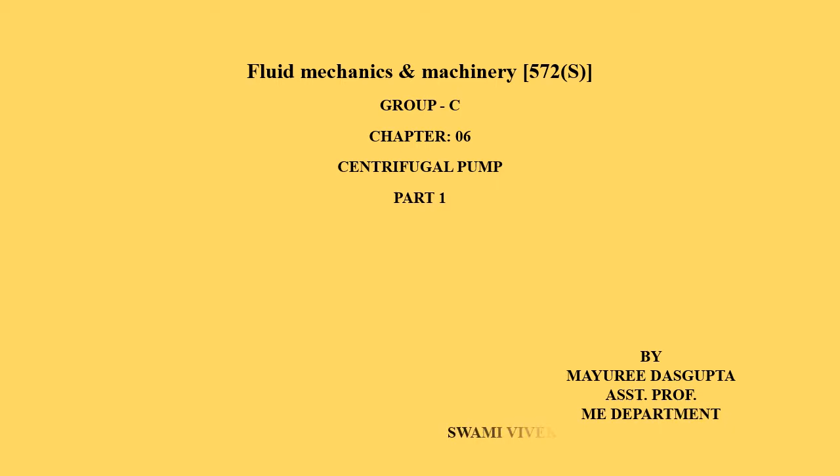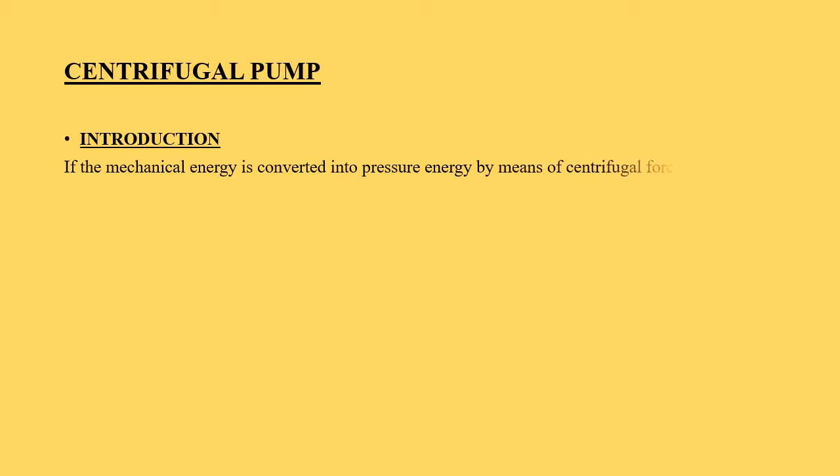The hydraulic machines which convert mechanical energy into hydraulic energy are called pumps. The hydraulic energy here is in the form of pressure energy. If the mechanical energy is converted into pressure energy by means of centrifugal force acting on the fluid, then the hydraulic machine is called a centrifugal pump.

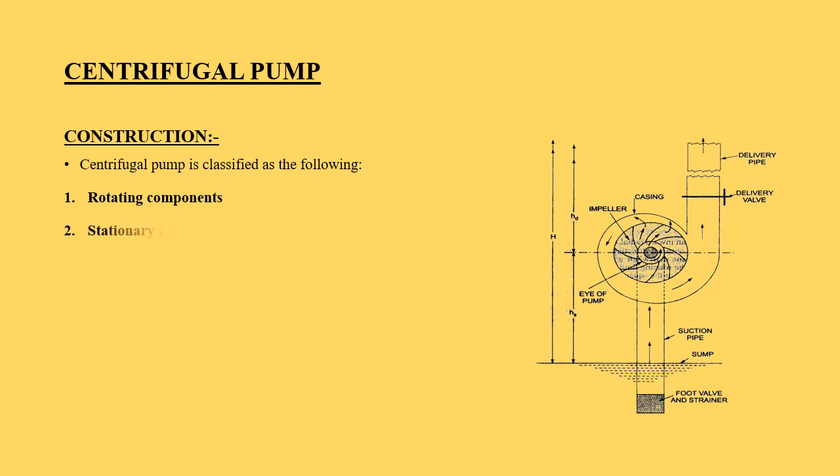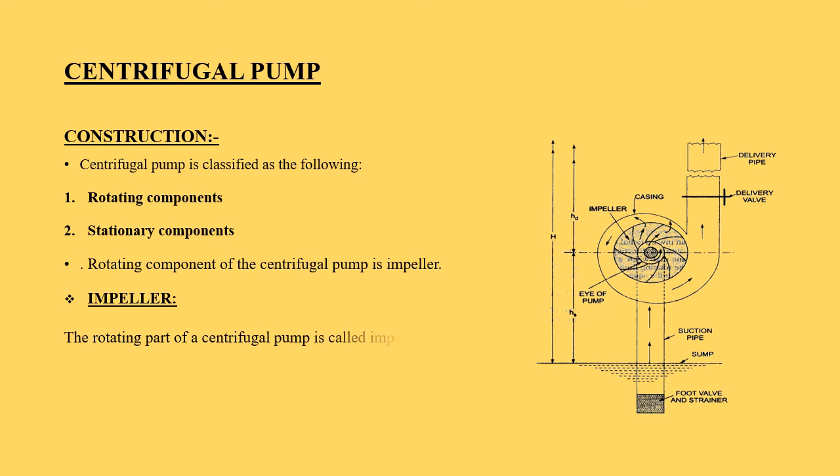There are two types of components in a centrifugal pump: the rotating component and the stationary component. Impeller is the rotating component. It consists of a series of backward curved vanes, and the impeller is mounted on the shaft which is connected to the shaft of an electric motor.

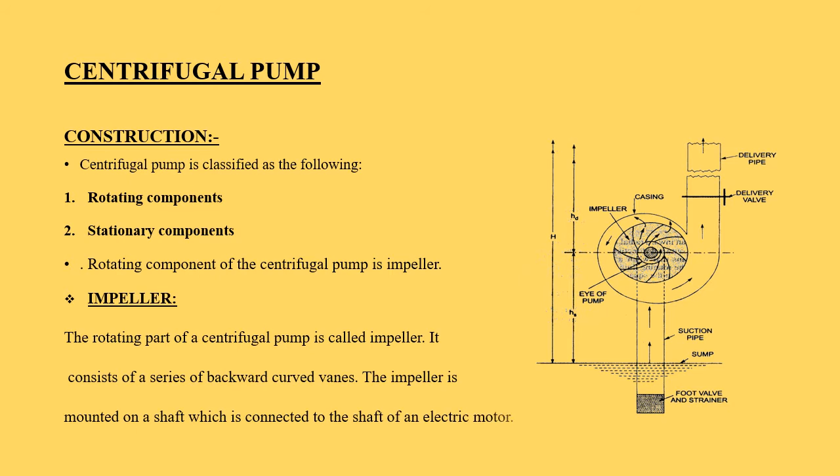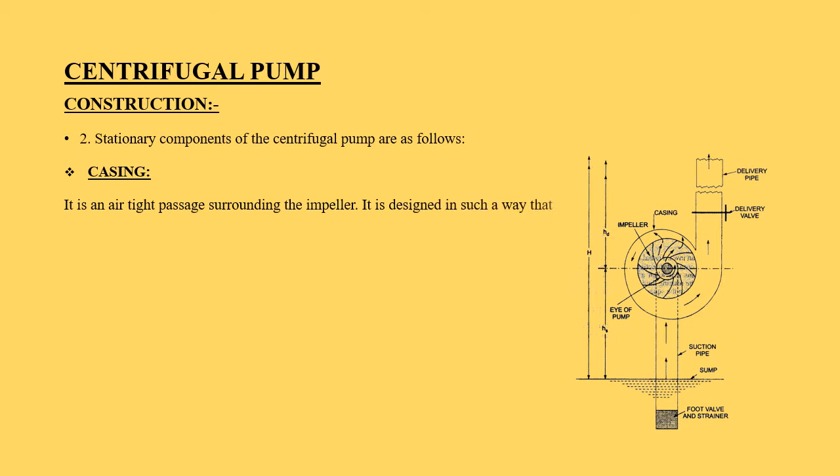The stationary components of a centrifugal pump are casing, suction pipe and delivery pipe. The casing is an airtight passage surrounding the impeller, and it is designed in such a way that the kinetic energy of the water discharged at the outlet of the impeller is converted into pressure energy before the water leaves the casing and enters the delivery pipe.

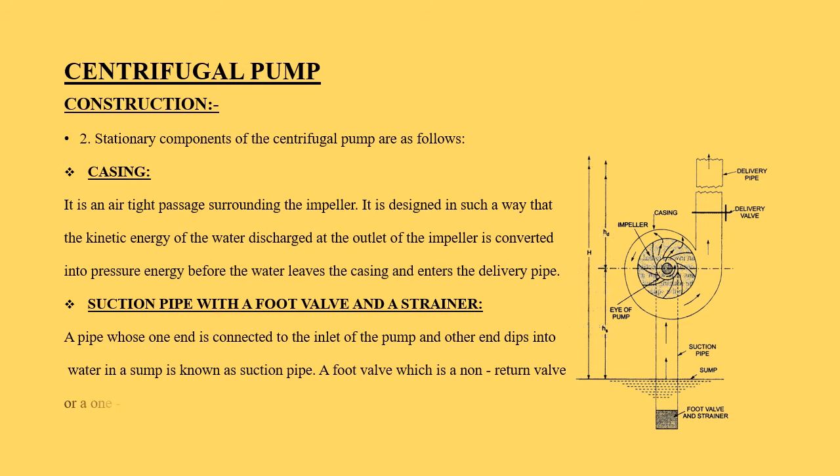A suction pipe is a pipe whose one end is connected to the inlet of the pump and the other end dips into the water in a sump. A foot valve, which is a non-return or one-way type valve, is fitted at the lower end of the suction pipe and it opens only in the upward direction. A strainer is also fitted at the lower end of the suction pipe.

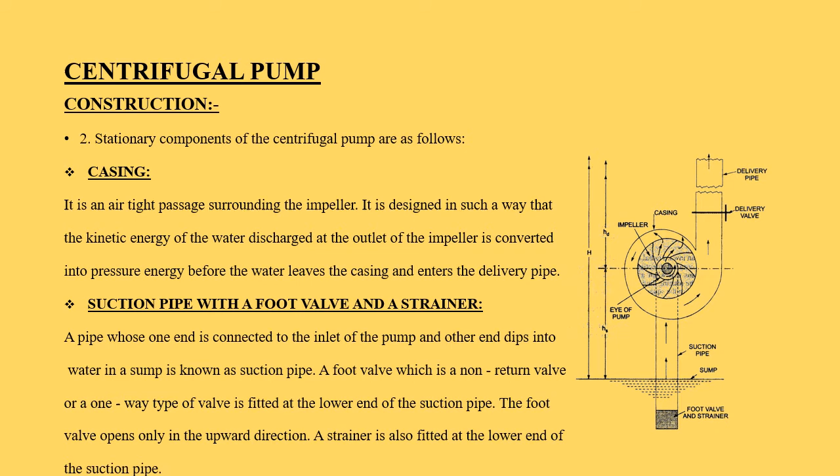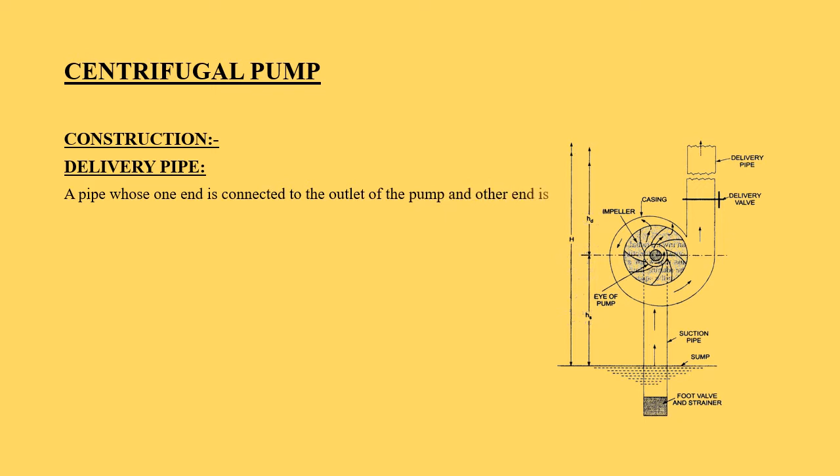A delivery pipe is a pipe whose one end is connected to the outlet of the pump and the other end is involved in delivering the water at a required height.

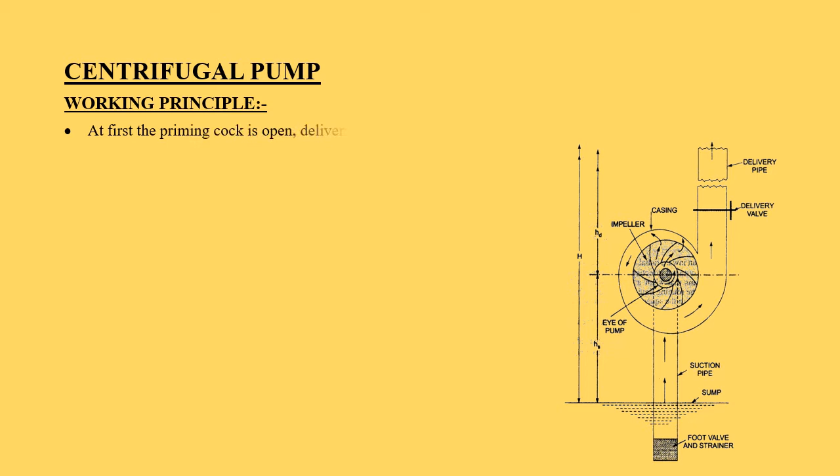Priming is necessary before starting a centrifugal pump. So at first, the priming cock is opened and the delivery valve is closed, and then the liquid is poured through the priming funnel until it overflows through the funnel, which ensures that air has been removed from the pump casing, impeller and suction pipe.

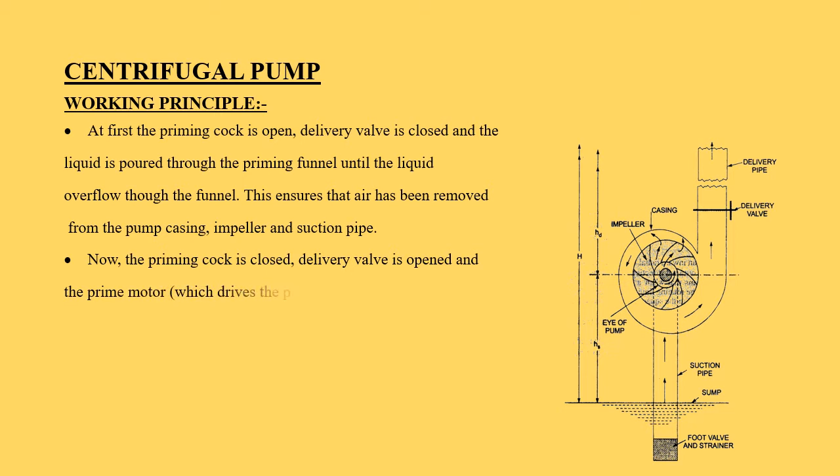Then the priming cock is closed and the delivery valve is open, and a prime mover is necessary to start to cause the rotation of the impeller.

Now the liquid from the sump is sucked through the suction pipe at the center of the impeller, and due to the centrifugal force, the liquid in the impeller moves away from the center along the curved vanes, reaches the periphery of the impeller and finally flows into the pump casing in the same direction as that of the impeller.

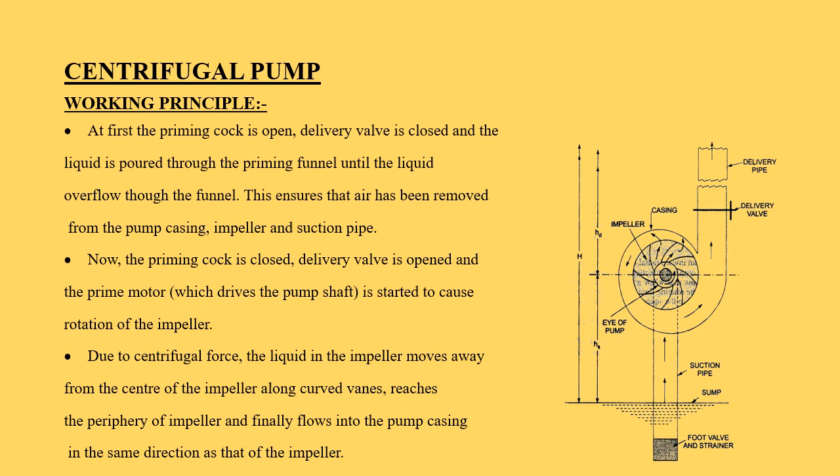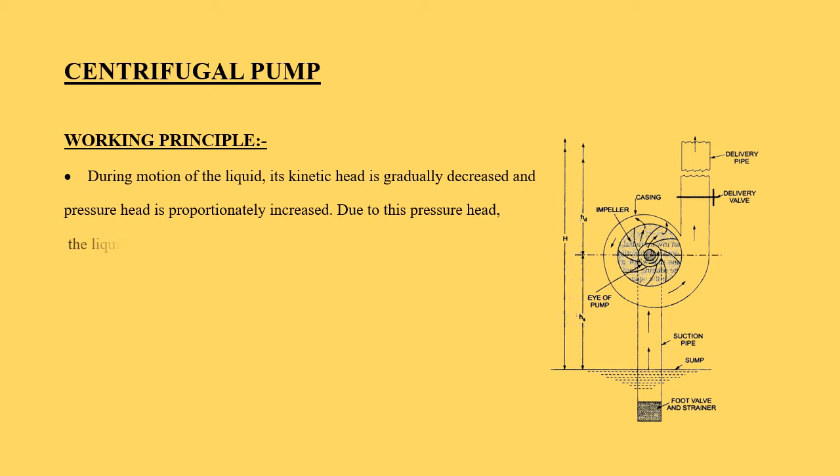During the motion of the liquid, its kinetic head is gradually decreased and pressure head is proportionately increased. And due to this pressure head, the liquid is delivered to the required place.

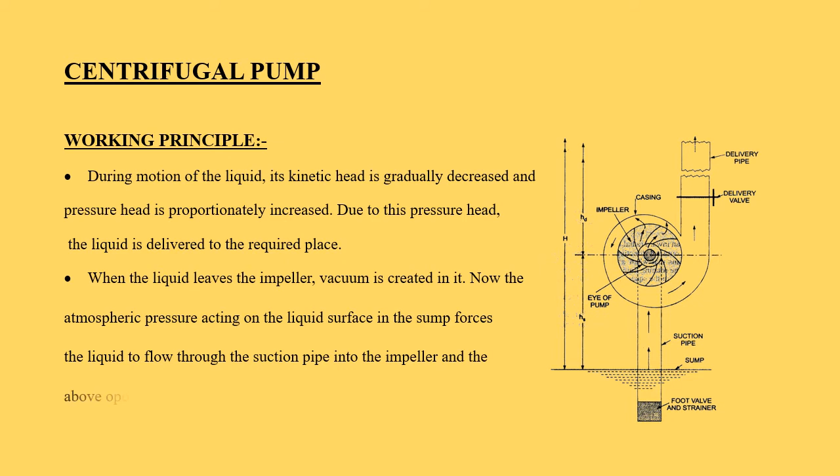When the liquid leaves the impeller, vacuum is created in it and the atmospheric pressure acting on the liquid surface in the sump forces the liquid to flow through the suction pipe into the impeller, and again the operation is repeated.

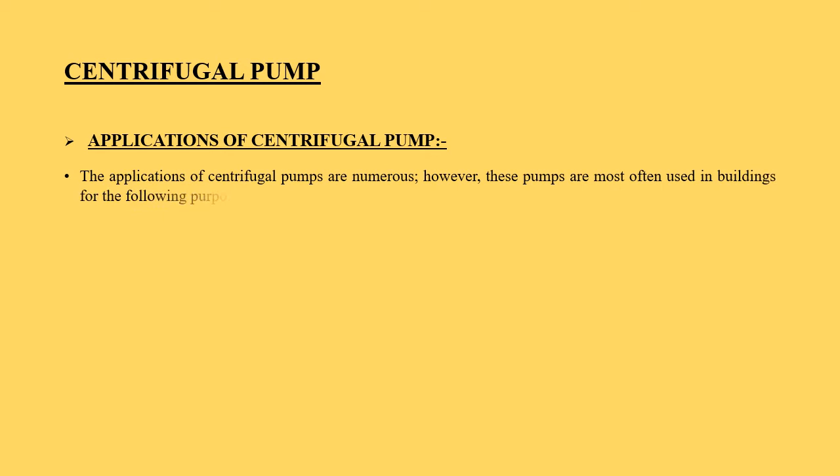The applications of centrifugal pump are numerous, but these pumps are most often used in buildings for different purposes, such as for general water supply, providing booster service, and domestic water supply. It supports fire protection systems. It provides hot water circulating service, and also provides sump drainage.

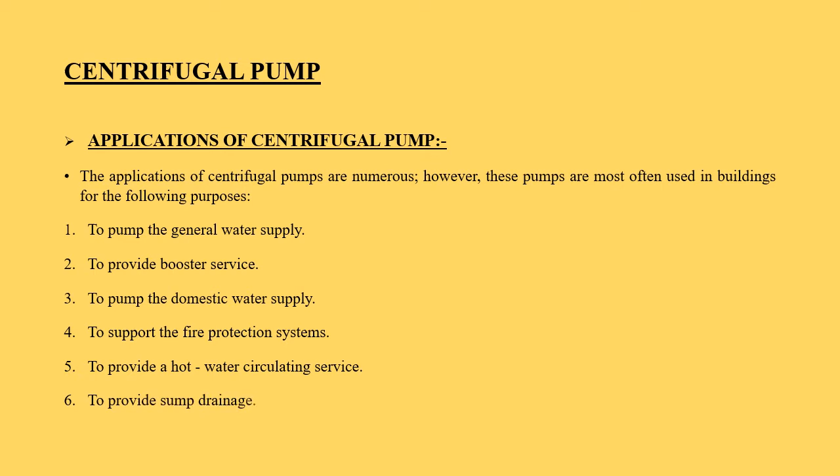There are three types of casings used in centrifugal pump: volute casing, vortex casing, and casings with guide blades.

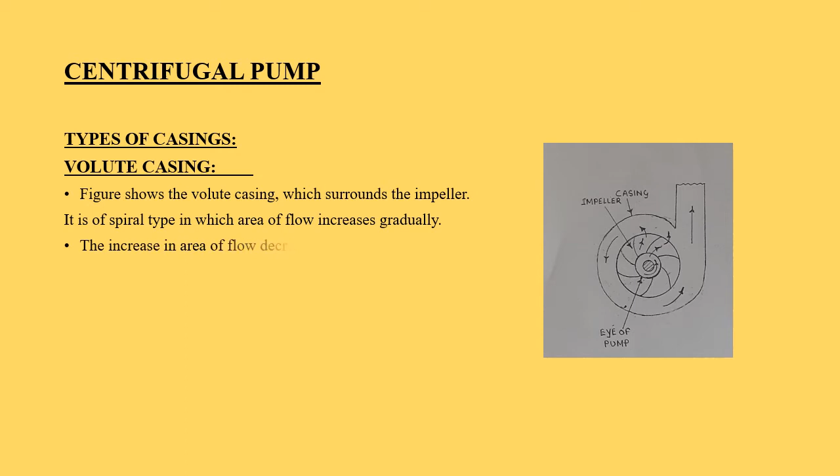The volute casing is a casing which surrounds the impeller. It is of spiral type where the area of flow increases gradually. The increase in area of flow decreases the velocity of flow and increases the pressure of water flowing through the casing. In volute casing, it is observed that the efficiency of the pump increases only slightly as a large amount of energy is lost due to the formation of eddies in this type of casing.

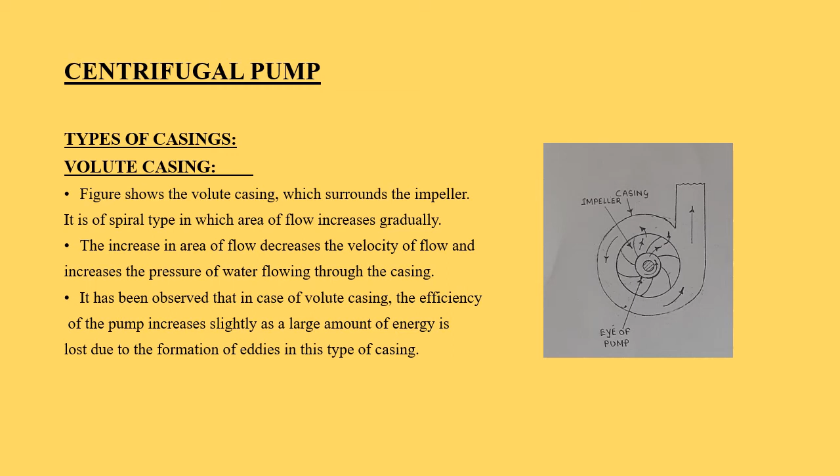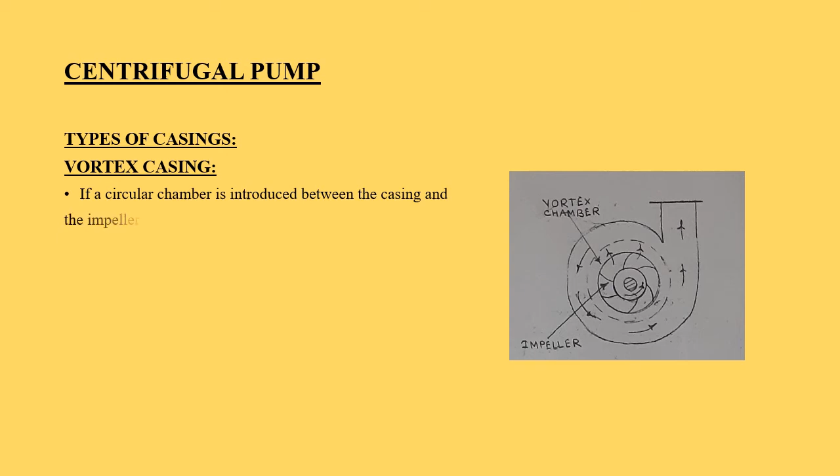In vortex casing, a circular chamber is introduced between the casing and the impeller. By introducing it, the loss of energy due to the formation of eddies is reduced to a considerable extent. Thus, the efficiency of the pump becomes more than the efficiency when only volute casing is provided.

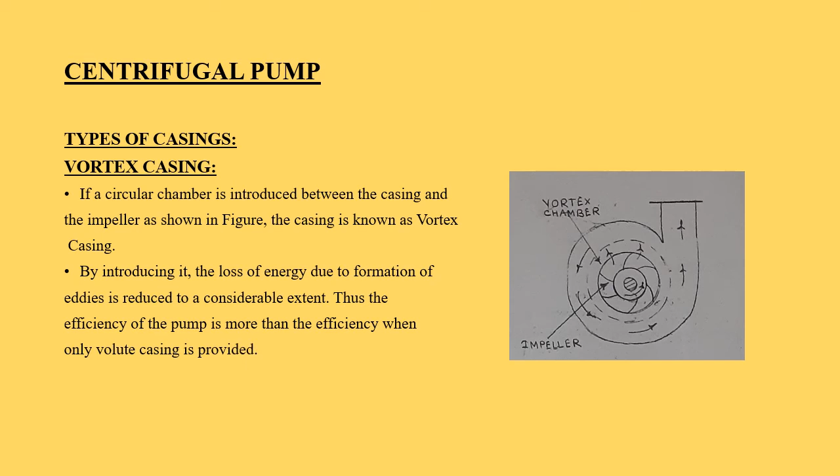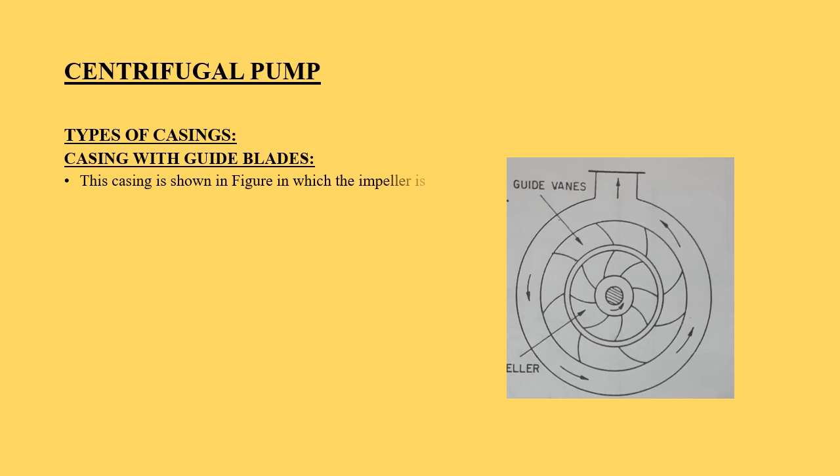Another type of casing is casing with guide blades. In this type, the impeller is surrounded by a series of guide blades mounted on a ring called a diffuser. The guide vanes are designed in such a manner that the water from the impeller enters the guide vanes without shock.

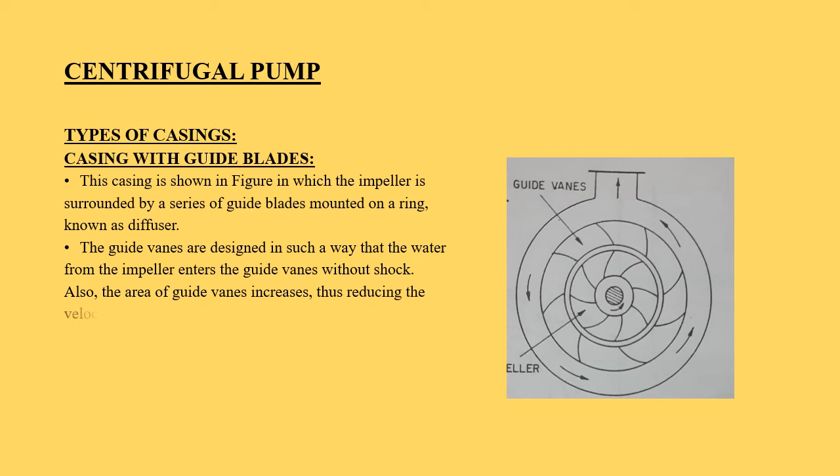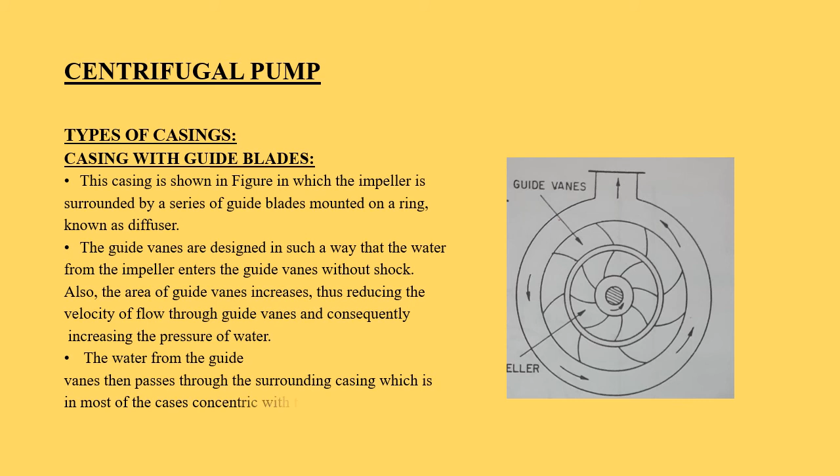Also, the area of the guide vanes increases, thus reducing the velocity of flow through the guide vanes and consequently the pressure of the water rises. The water from the guide vanes then passes to the surrounding casing, which is in most cases concentric with the impeller.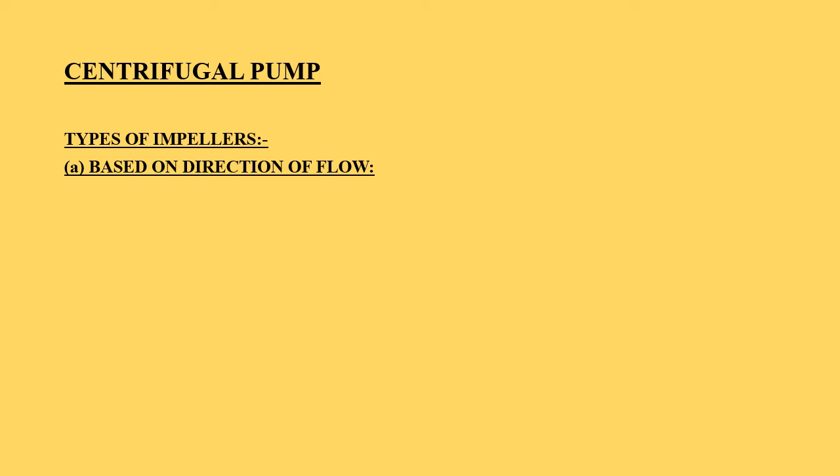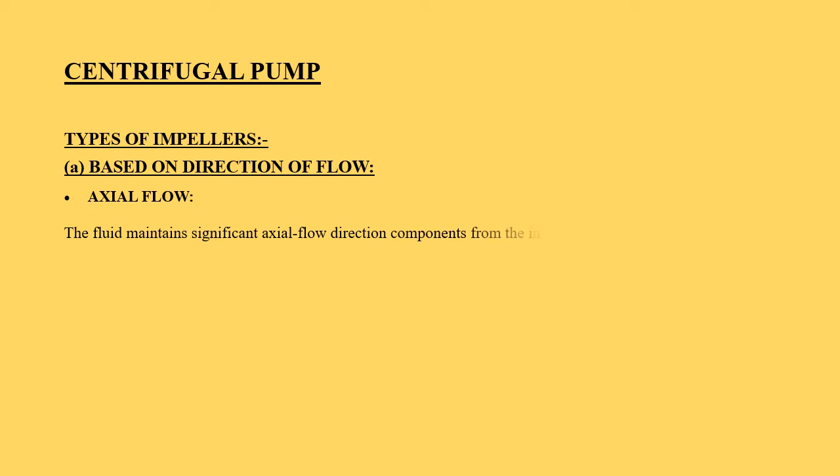There are various types of impellers used in centrifugal pump based on direction of flow and suction type. As per direction of flow, the different types are axial flow, radial flow and mixed flow. In axial flow type, the fluid maintains significant axial flow direction components from the inlet to outlet of the rotor. In radial flow, the flow across the blades involves a substantial radial flow component at the rotor inlet, outlet, or both.

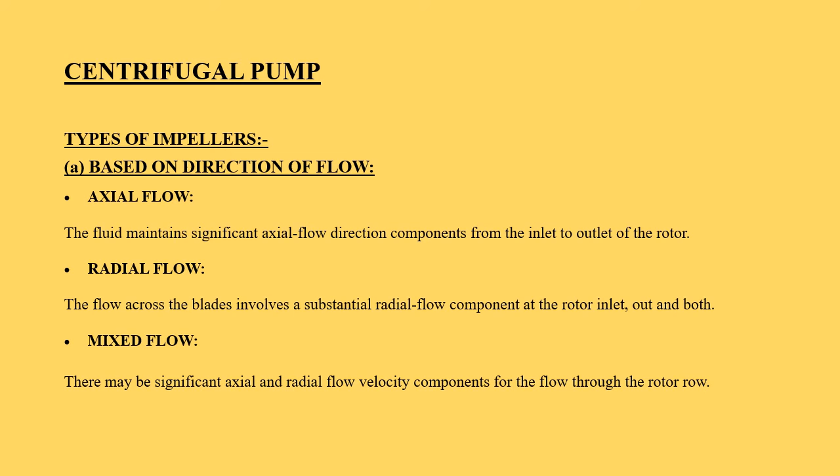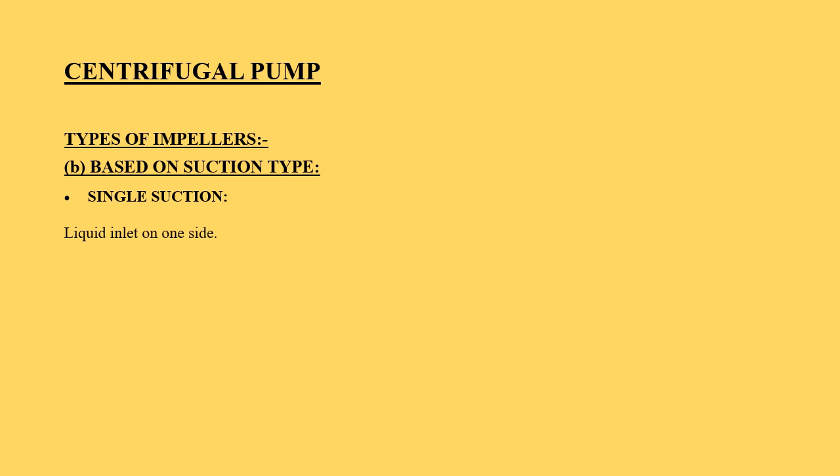In mixed flow type, there are significant axial and radial flow velocity components for the flow through the rotor. On the basis of suction type, the impellers are of two types: single suction and double suction. In single suction, liquid inlet is on one side, and in double suction, liquid enters the impeller symmetrically from both sides.

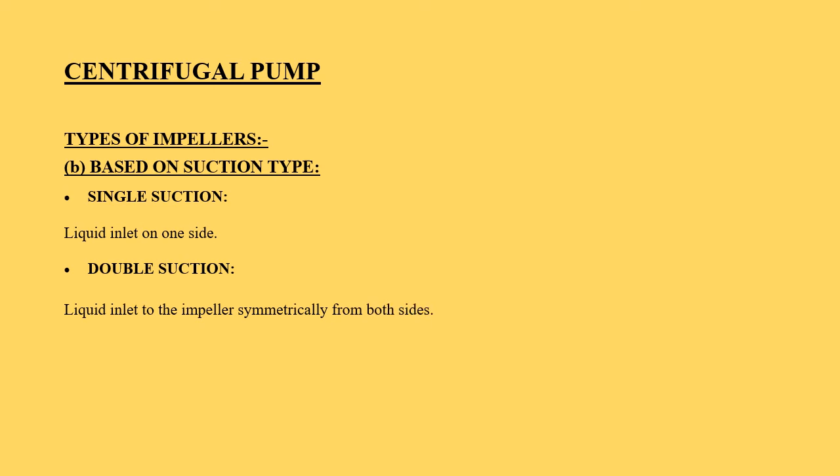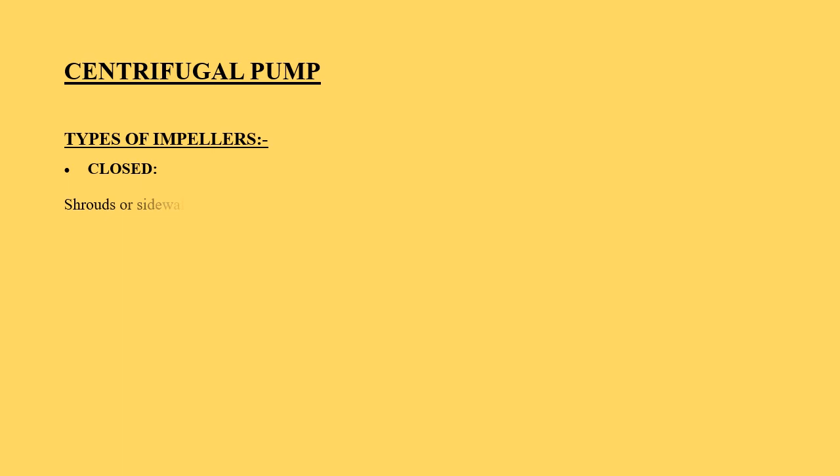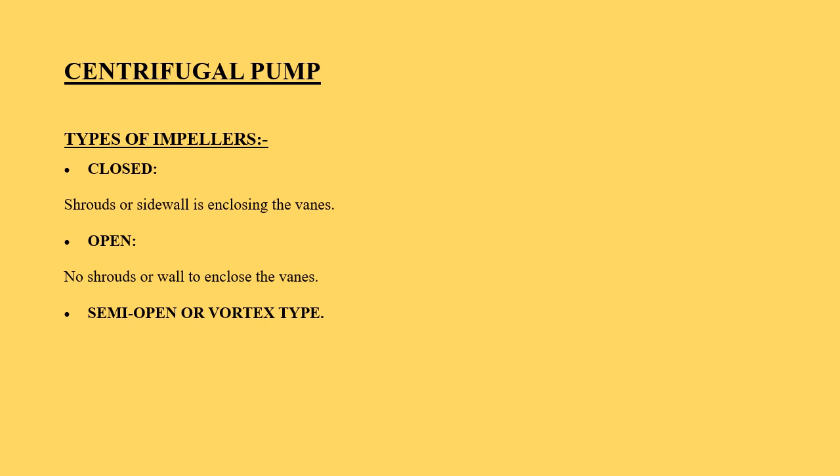In closed type impellers, shrouds or sidewalls enclose the vanes, and in open type impellers, there are no shrouds or walls to enclose the vanes. Another type of impeller used in centrifugal pump is semi-open or vortex type.